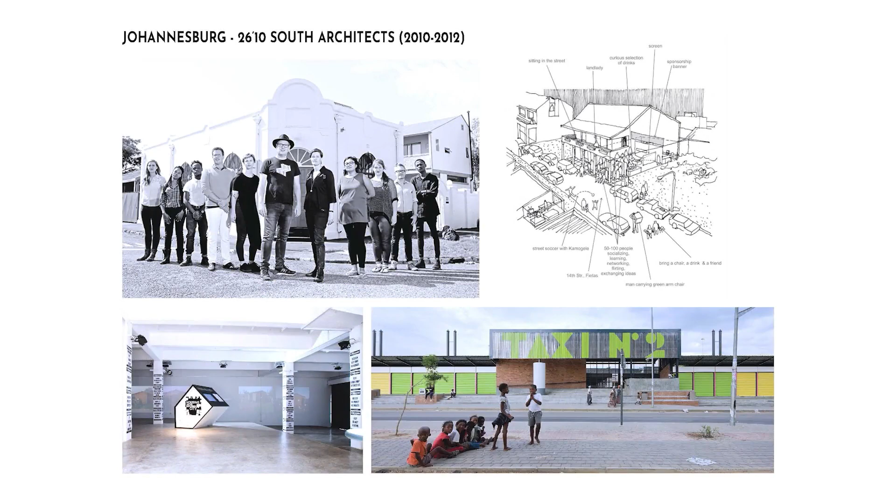Then I got encouraged heavily by one of my tutors to apply to work at 26'10 South Architects. Sorry, it's this outdated photo, Torsten. It may not be fair to the full team, this is from years ago. But I do want to say something about how this practice impacted me, because it really taught me how research in architecture was possible. And there is something about the name as well, being very local to Johannesburg and to your context, that I really appreciated working there.

Then also, this was a defining moment for me, this exhibition, because it enabled me to really center the African city. I know for students today at the GSA, it seems like a given. But if you think about the rest of the continent, a lot of the discourse of architecture didn't really speak about modern or contemporary architecture. And this exhibition that was done by David Adjaye back then really shifted that perspective, and indirectly brought me to London. But I got a chance to study at the University of Westminster.

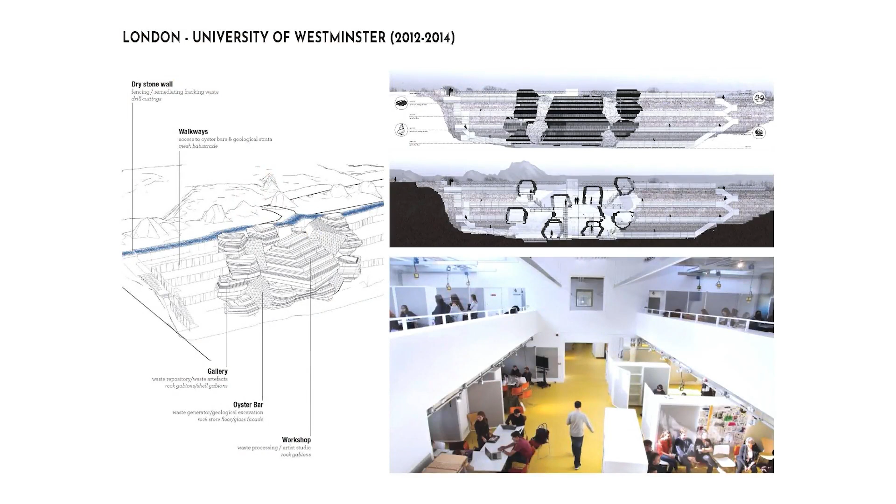My second year was under the leadership of Professor Lindsay Bremner. So South Africa met me again in London, which was a real lifesaver, because I learned so much from her and her very unique understanding of the Anthropocene as well, which was the subject of my final year thesis. And it made me think a little bit deeply about the importance or the weight of fossil resources, whether it's material or energy, like oil and gas that we use so much in the field of construction.

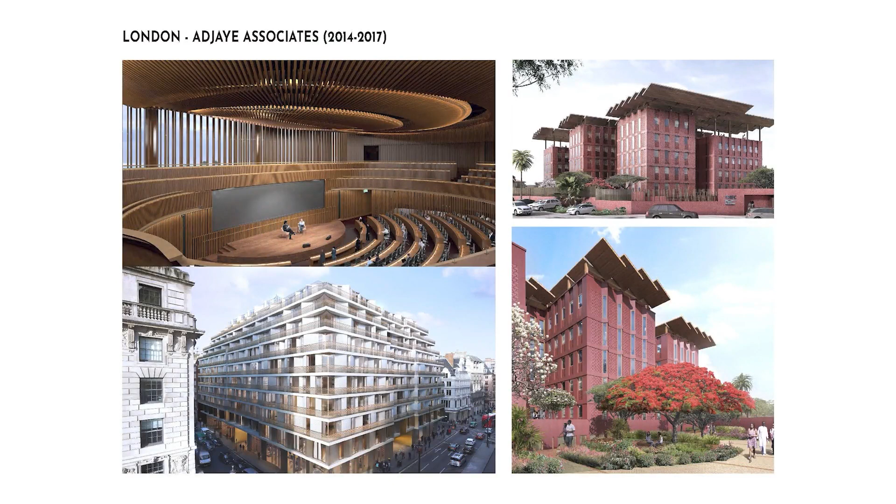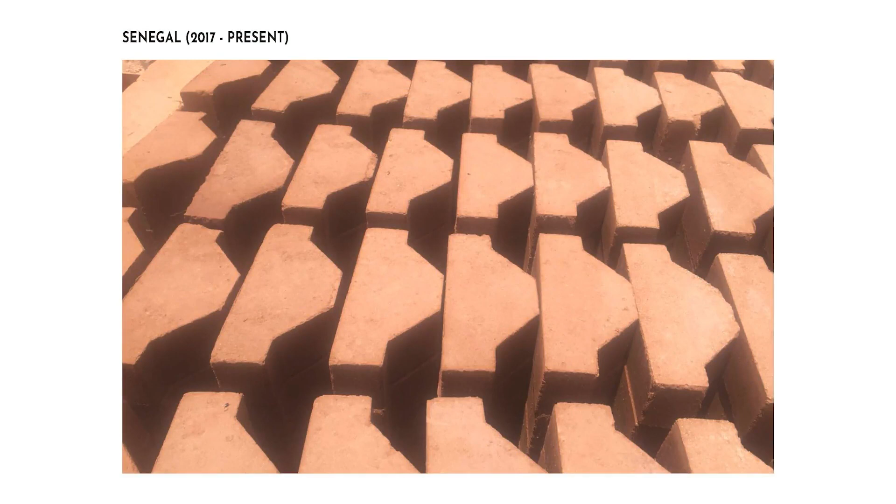I then went on to work at Adjaye Associates in London. And I got to work on very corporate projects, actually, working for big banks. One project was in London, and the other project was actually Dakar. The project you see to your right is the headquarters of the IFC. And that is, in a way, the project that prepared my transition to return back to my fatherland of Senegal. And these were the brick samples that were produced in that building. And through that project, I got a chance to meet a really incredible Senegalese engineer called Doudou Dème.

Who had come back to Senegal nearly 6 years prior to me and set up this company that was producing earth bricks. Through him, I got to meet many other architects and we formed a collective. We met on this particular street called Worofila. We didn't know that we were going to name ourselves that, but I had a little bit of inspiration from another practice that named itself through its territoriality. So when it came time to name ourselves, we just picked the name of the street where we are in Senegal. That's what is behind Worofila, which actually means seven. So we're on Street 7. It's not very inventive, but it was very important, jokes aside, that we are able to really be informed by our context, but also learn how to respond to it in a responsible manner.

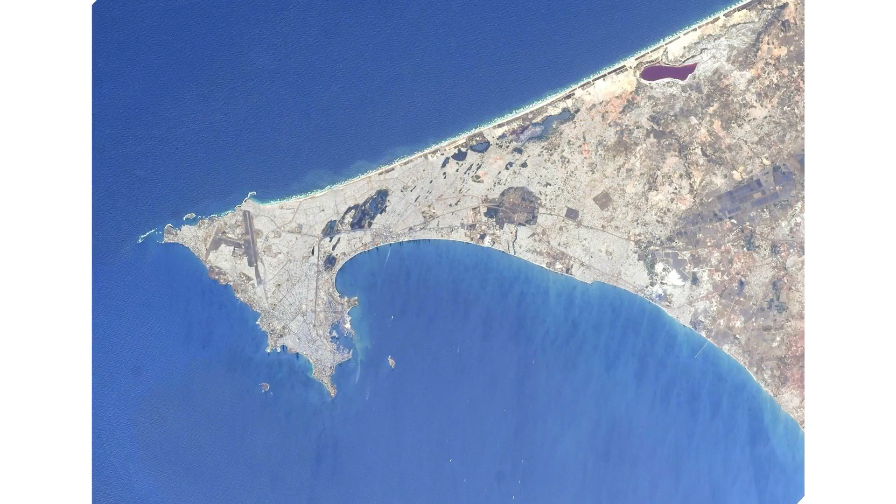Dakar is the most western city on the African continent. It sits on the peninsula, which is the peninsula of the Green Cape, the Cabo Verde archipelago islands just off the coast. Our peninsula was also named like that by the Portuguese explorer because of how green it used to be. Fast forward to today, this is an aerial satellite imagery of the peninsula, which has taken a very distinctive gray color, which is really a manifestation of the presence of concrete as a main material that produces the city.

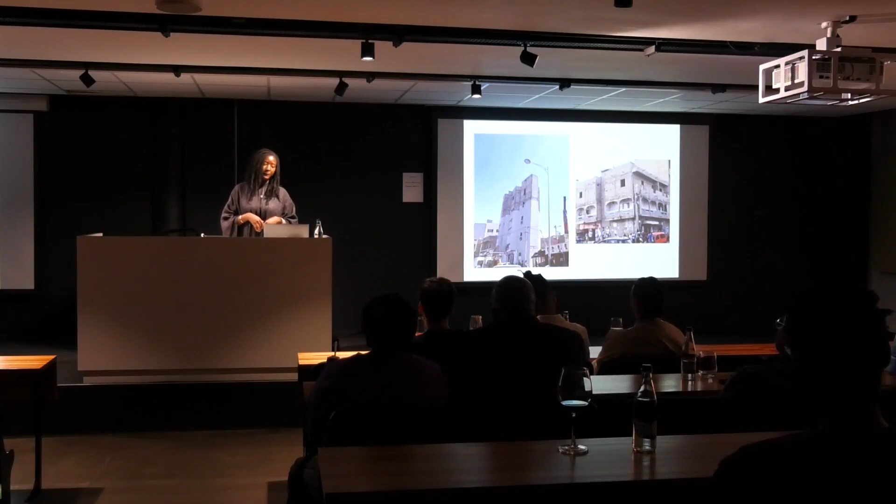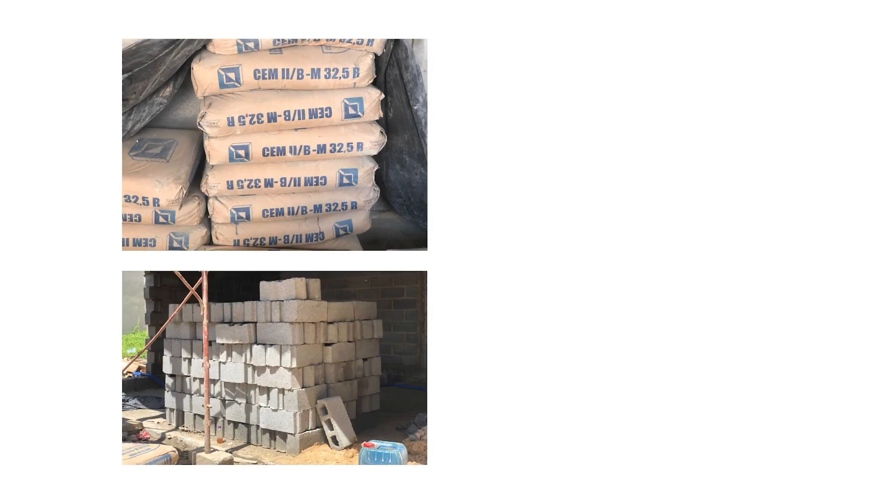It's also important to say that in recent decades, a lot of the city has been produced by people themselves, and concrete or cement is really the material of empowerment. In a context where a lot of failures from the state have operated, people have taken it onto themselves to really produce housing, done through cement. Senegal also produces cement, it's our 5th largest export. The cement is ubiquitous, you can buy it at any hardware store, and I think it just gives this ability, this facility, to want to buy a bag of cement. If you have a little bit of water and sand, you can start to produce your masonry blocks.

Usually the pattern of building is to get land acquisition, and then the first thing, once you have a little money, you buy some bags of cement, you produce the bricks, sometimes leave them on site, and you build incrementally.

When we look a little bit at the geography of production of concrete, which is the main material, a lot of these cement factories are actually within, I would say, about 100 kilometers from Dakar. Most of them sit within even the region of Dakar, and many of the extraction sites for basalt used as aggregates, and the place of production or recycling of steel in Senegal as well, are actually within the region. So we're talking about ecologies that are really in close proximity to the capital.

I think it's important to take a closer look and never dissociate materials from the sites where the raw materials come from, because they have certain realities. There are certain disturbances as well of the environment.

The top picture is a classic pine forest, not far from Dakar. A lot of the baobabs in this forest are being knocked over because underneath it you have limestone. I think, again, even when we look at this composition, there's something that needs to be recentered, which is the fact that it comes from a lot of these natural geogenic materials, because cement is also made with lime.

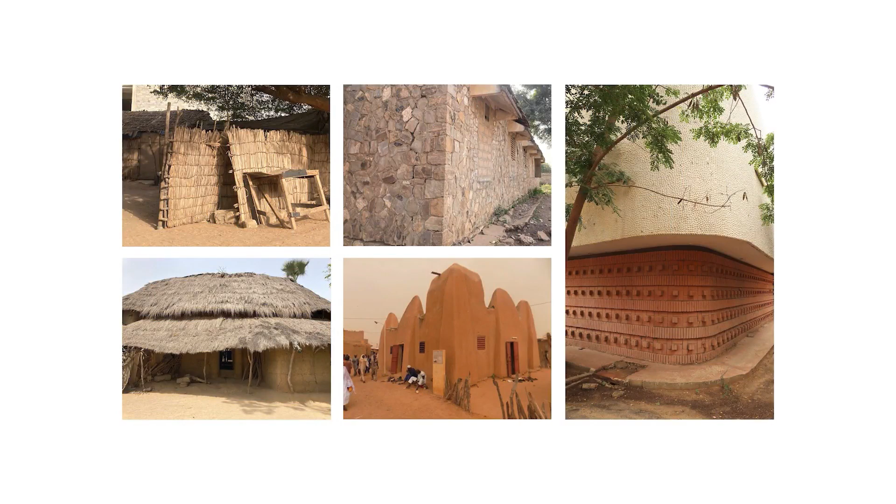So a lot of this extraction of limestone is what produces cement, along with sand and also clay. A lot of the clay quarries that they have nowadays are actually bought by cement factories. It's interesting to look at the ingredients of cement in relation to the kind of architecture and very rich architectural language that they were able to produce in the past.

I think when we look at different epochs of Senegalese architecture, we do see a very inventive use of clay, of fiber, of stone, of ceramics even, or shells as well, which often get used to produce a form of lime.

So this is the context in which we feel that bioclimatic architecture can become an interesting response to this over-concretization of the landscape, because with the concrete and the way that it's utilized, there's a lot of thermal discomfort that is generated in the interiors, but at the cityscape as well, because as a peninsula, people also densify.

I just want to speak to you a little bit through the methodology and the way in which bioclimatic architecture is also tied to architectural traditions. Our first vantage point is really to look at the climate, and this is a sort of interpretation of the Köppen climatic map, understanding the continent through its climatic zones.

Most of Senegal sits within the region commonly known as the Sahel, which stretches from Dakar to Djibouti on the Red Sea. We sit mostly in a hot and arid climate, with a more humid zone to the south. Looking at the stratification, the north gets very desertic because we're nearing the Sahara Desert, and the south is a lot more humid.

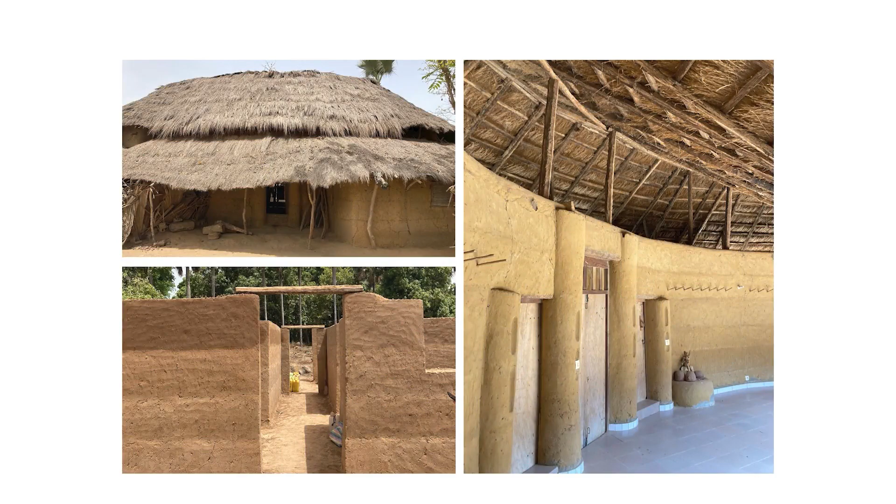The southern region, called Casamance, has a really rich and lush landscape. I say this as somebody from Dakar, but I think it also has a very unique architecture that speaks a lot to its climate. One of the most unique architectural typologies of the south are the impluvium houses, which are actually indicators of the geography in which they sit. Of any form of vernacular or traditional architecture, I think the learnings from it are quite incredible, because they give us cues on how to respond to a particular geography.

I first engaged with the materials we had there, but most importantly, to respond to the climate. Even looking at this picture, you understand this is a place that gets a lot of rain, because of the structure of the roof—as an impluvium, it's really a response to rain, to be able to gather it.

I think these simple diagrams are important to showcase what we can learn from this traditional typology.

With the impluvium house, it's important to see how it's really shelled up from the outside, and orchestrated around a central courtyard and atrium, which is the main source of sunlight.

After learning those principles, this is a good way to speak about one of our key projects, a vertical house in Dakar, completed about two years ago. This was a very important project because we had to find a way to produce housing in the city where the land parcel was quite tight—the plots are 150 square meters. The brief was to produce an earthen home in a very dense urban environment.

That forced us to look at how to achieve a certain level of verticalization, but also of passive design methodology, so that this house would not require any AC or heating for thermal comfort.

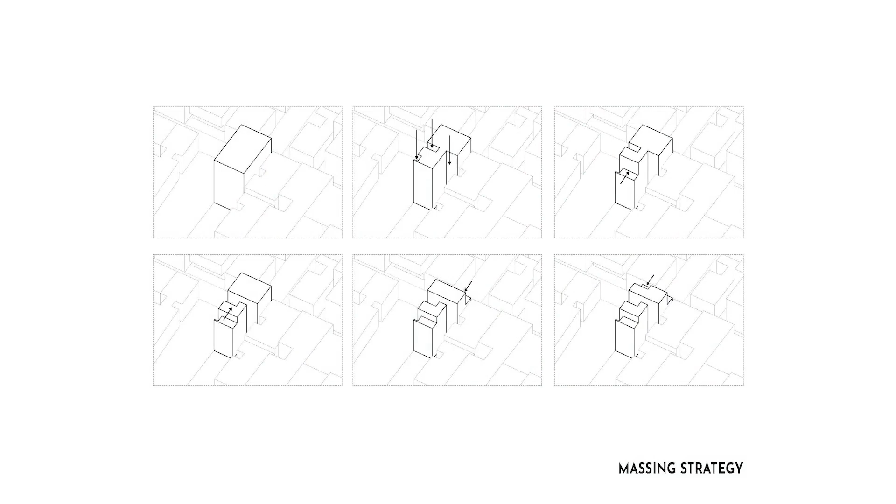The massing strategy managed to respect the urban planning laws, which unfortunately in Dakar is quite exceptional, requiring you to build on a maximum of 70% of the land. So the first thing was to create these atria—about three of them—which are useful for ventilation and lighting, and to have setbacks from the third floor to allow for rights of light, so there's no big block preventing light access to the neighbors.

This is how it sits within the environment—going back to that image of the concrete city, this is the project in relation to its urban setting.

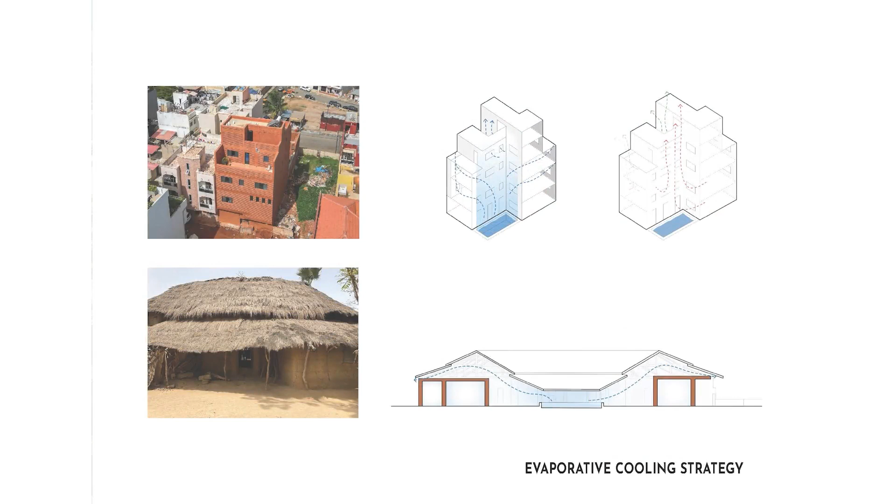This comparative diagram often showcases the ways in which the central atrium, which actually features a pool, is able to play a role in contributing to cooling through the evaporative cooling strategy, the same way as with the impluvium houses.

We also managed through this carving out to ensure that most rooms have cross ventilation as well, and ensured that through these various atriums we're able to get some amount of light in addition to the main street facade that they have.

Other strategies were integrated into the facade to provide cooling, which also speaks to the materiality of the project, made with compressed earth blocks. We found a way to have a facade system that allows for shading on part of the wall, particularly since we're in the northern hemisphere facing the southern sun, which is the problem especially at midday when it's really hot.

So this is a small strategy that we developed and use in multiple other projects.

Let's take a closer look at the detailing, because when you work with bricks, and this is a load-bearing brick project, although there is some column reinforcement which we did in order to reduce the thickness of the wall, you have to be very intentional about how you case the bricks. I don't have to explain brick design to people in South Africa because it's very ubiquitous here, but this is something we've taken to task, and I think we also learned how to play with it to produce a very distinctive materiality that speaks to the composition of the wall and is able to do multiple things.

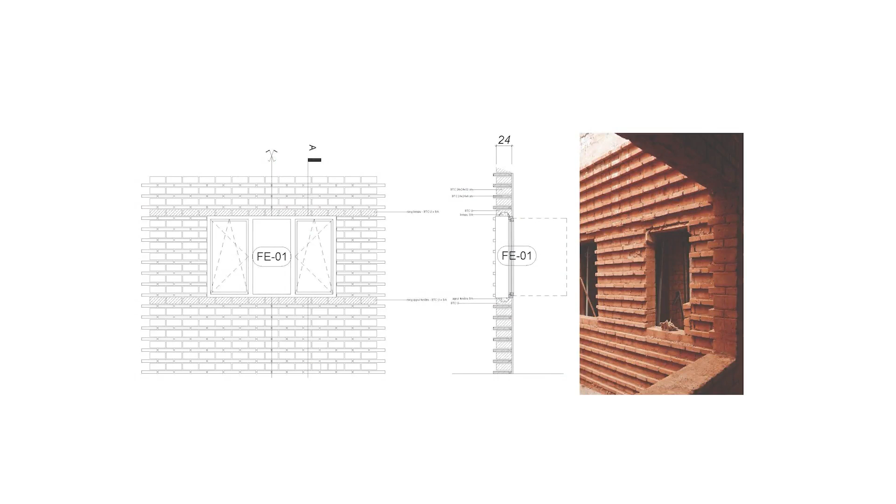There are also lots of detailings around openings, because we're working with a modular material in order to prevent any type of light offcuts and really have the unique quality of the brick determine the composition of the facade.

The final finish is really the raw color of the earth, especially on the exterior. I think it's important that it communicates what the building is made of, but also that we live in a context with a lot of sandy winds, and rather than paint it or use a light color, this material actually sustains that sandy air quite well.

Shifting a little to the east, still within West Africa, another territory where we've gotten the opportunity to work, actually our first work outside of Senegal, is Nigeria. Looking at it from a regional climatic and historical perspective, it's interesting to see the commonalities that exist with Senegal. I'll draw on those comparisons a lot, because as an architect coming from Senegal trying to learn from the place and its traditions, you always wonder: if you don't know about a certain place, how can you design for it? It's interesting to see how the baggage we hold from that region can travel, and how we find echoes in a context like Nigeria.

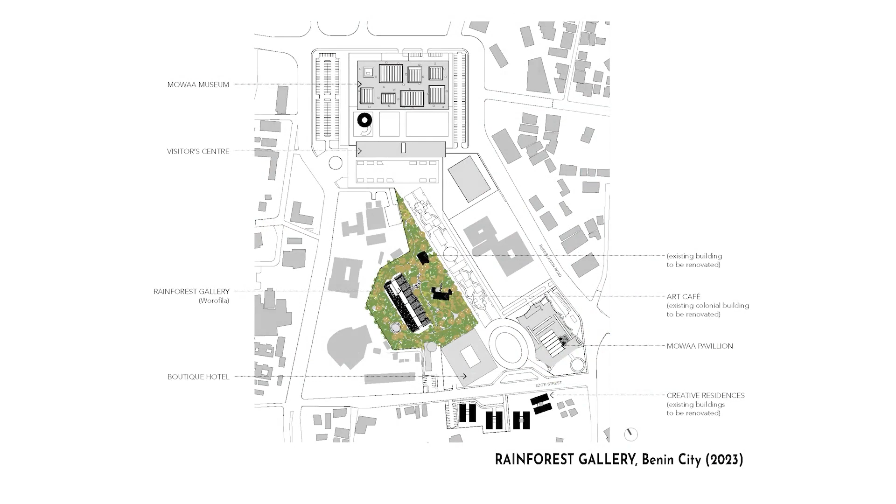The project we got to do is part of the larger campus of the Museum of West African Art, in the historical city of Benin. We were commissioned to build the Rainforest Gallery, a gallery for art meant to sit in this precinct, which also includes a museum, a boutique hotel, and a pavilion for archaeological research. Our project sits within a replanted rainforest, also seen as part of a restoration effort in a place that has lost a lot of its natural ecosystem.

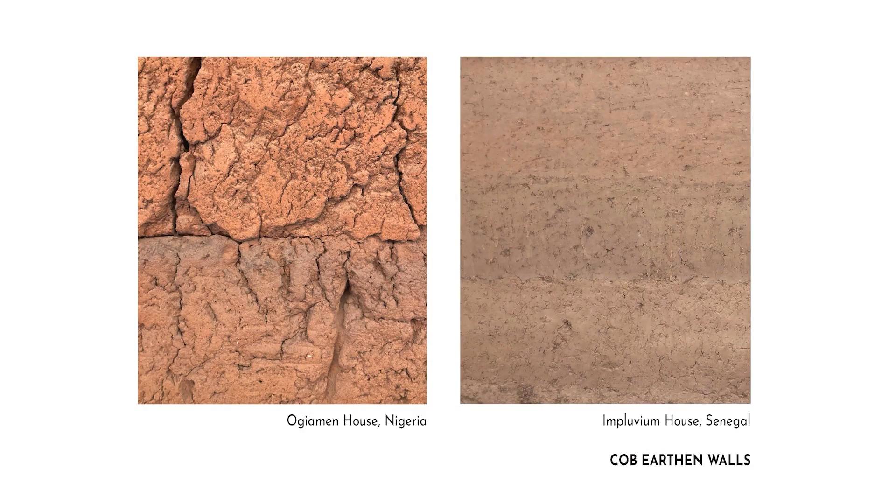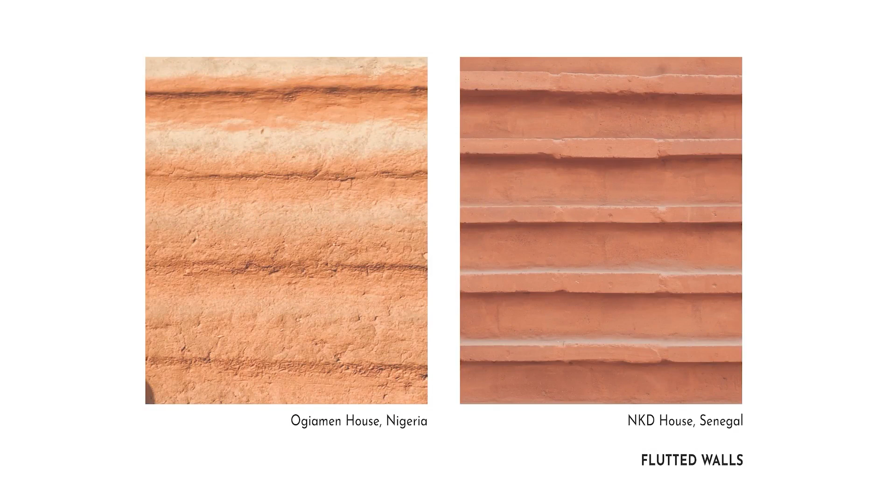So to draw again these parallels, you look at the left, the wall in Benin, of a house of a noble person, Ogiamen's house, and on the right you have the walls from Casamance in Senegal, and both of them are constructed using the technique of cob, which I'll speak to a little bit later. So we already had a certain degree of familiarity with this technique once we arrived in Nigeria.

Another thing about these walls, there's this horizontal texture that you see, which is called fluting, a technique which actually allows for a control of the erosion of the walls through water. By scoring the walls, you slow down the way that water percolates through it. So it is a form of erosion control. But it was also something that was only made in this royal architecture because it also demarcated status.

Another funny anecdote, I'll speak about it later, but the NKD house, the vertical house, has, I think, a similar texture through the wall, even though this was not thought of as a form of erosion control. But again, we recognize that certain language in the architecture.

We may have heard about the Benin bronzes, which are really at the heart of a lot of the conversation around restitution, because it's one of the most evidently documented cases of looting. Yet there's an argument as to whether they should be returned or not. But yeah, the campus also, I think, was the project that was generated out of the conversations that have been held around it.

But also the anecdote that I wanted to share from researching and understanding this royal and palace architecture is that the cob wall layers, because it's built in layers, actually had names, and you could have I think up to six. So you have the foundation layer that had a name, and all the various layers, and of course only the king could have the biggest amount of layers. I found it incredible that it was like a language to codify a construction technique, which is very precious to us.

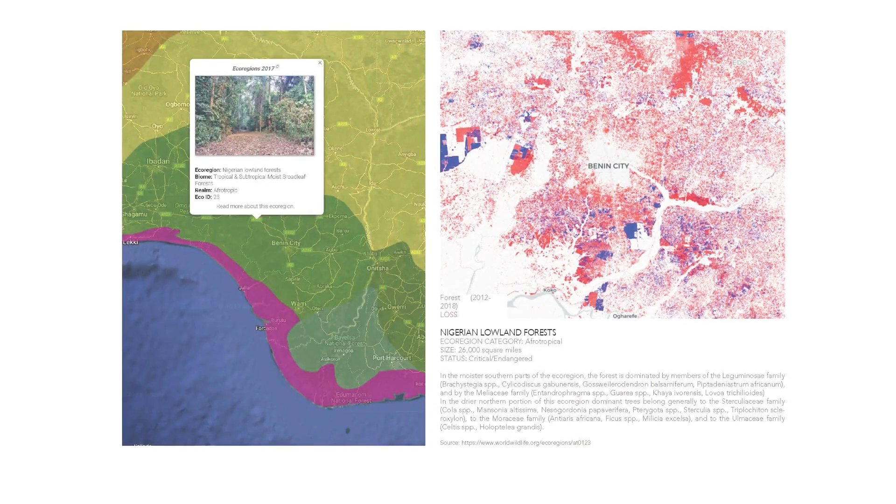Rainforest, again, this is a map of the loss of forestation in red that you can see in the context of Benin City. The type of vegetation of the place is mostly tropical, subtropical, moist broadleaf forest. That's a biome. This project is an effort to contribute to reforestation.

We looked at working with endemic trees, and making sure that the forest also had spaces for art that would complement whatever is happening inside the gallery, really allowing the visitors to inhabit this space. And that really guided a lot of our strategies for the design of this.

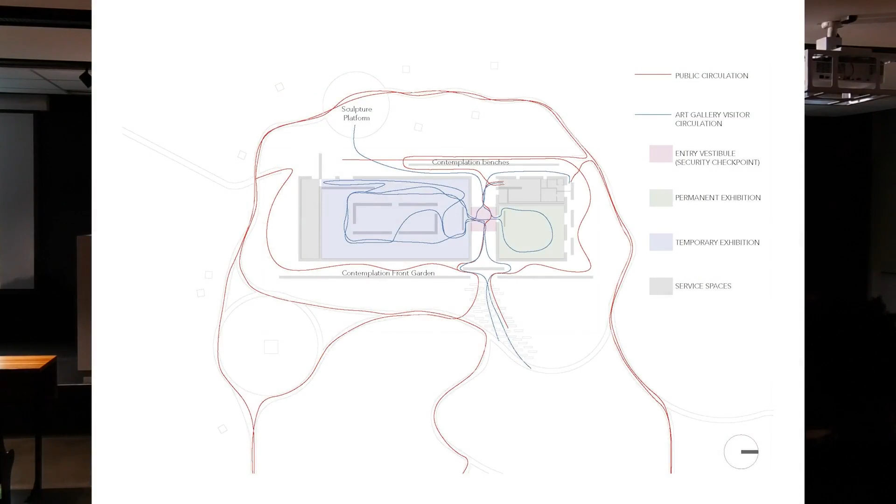It's really composed of two spaces. You have the permanent exhibition space, which is smaller, and the temporary exhibition space, and the two are separated by a vestibule. And our desire for this was to make sure that people could also inhabit the envelope of the building.

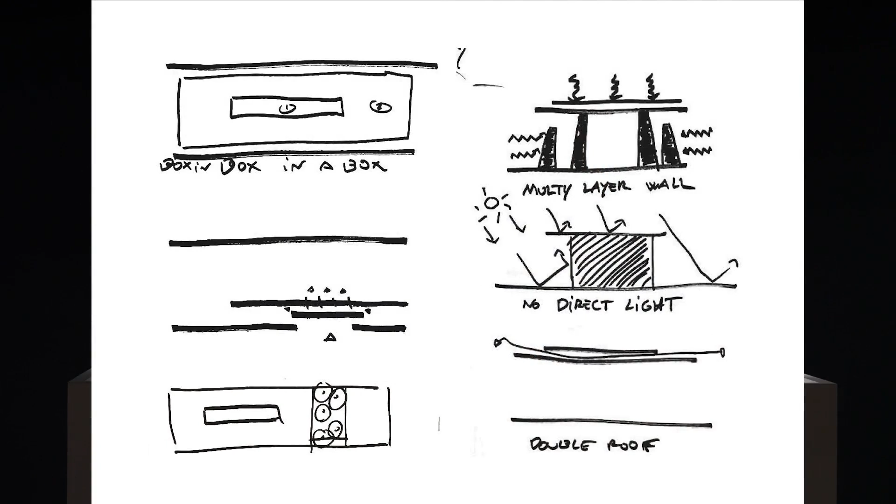So if you are sort of like public, that isn't necessarily going to the gallery, you can have some interaction with the building, and you can visit the gallery as well. You're able to have a kind of pop-up that allows you to personally engage with the envelope of the building.

And in terms of the generative strategy for this, it was very much guided by wanting to create a kind of microclimate in the gallery. We had some requirements for certain temperatures that we had to achieve, which are actually quite low given the temperatures of Benin. It was about 20 degrees, which is what was set by international standards, and 50% relative humidity.

So questions of climate control and the passive design strategy: even if the building would definitely require some level of air conditioning, we still wanted the architecture to contribute to lessening the load and reliance on technology for cooling. So we set in place a series of strategies. One is the box in the box, which is really effective for acoustic control, but also for thermal control, to have a space enclosed into another one.

The sequencing as well was really key, because we felt there was maybe a potential disposition to think that, you're going to have this forest, you're doing a gallery, you can have this very open glass box. We felt that this level of openness and transparency doesn't sit very well with the cultural understanding of space. Threshold is really important. How you approach a place, how it reveals itself, is something that is really key.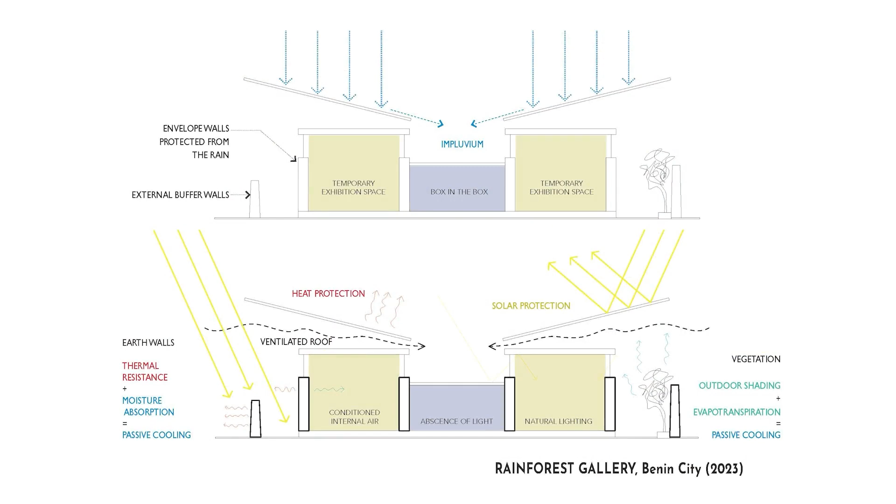Drawing again on parallels between the vernacular architecture of Benin and that of southern Senegal, a lot of the royal architecture also features this kind of impluvium, and the central lighting is something that we see in both architectures. We drew on that to devise the space of the gallery. So we have this inverted roof, which allows for central collection of rainwater.

And then we've lowered the middle space, the box in the box, because it allows us to have two aisles and two spaces that are indirectly lit. So we have a darker room in the middle, then the mid spaces on the periphery, and then the external buffer walls, which also allow us to contain a layer of vegetation, and give two things: one, increased thermal resistance,

but also allowing vegetation to come in close contact to the spaces that are inhabited in the building, because of the power it has to provide passive cooling through evapotranspiration. And earthen walls as well, because they are raw, have a potential for moisture absorption, which is one of the biggest properties contributing to thermal comfort, because especially in very high humidity environments, you want materials that absorb that humidity, so with lessened humidity you feel cooler or a little bit more comfortable.

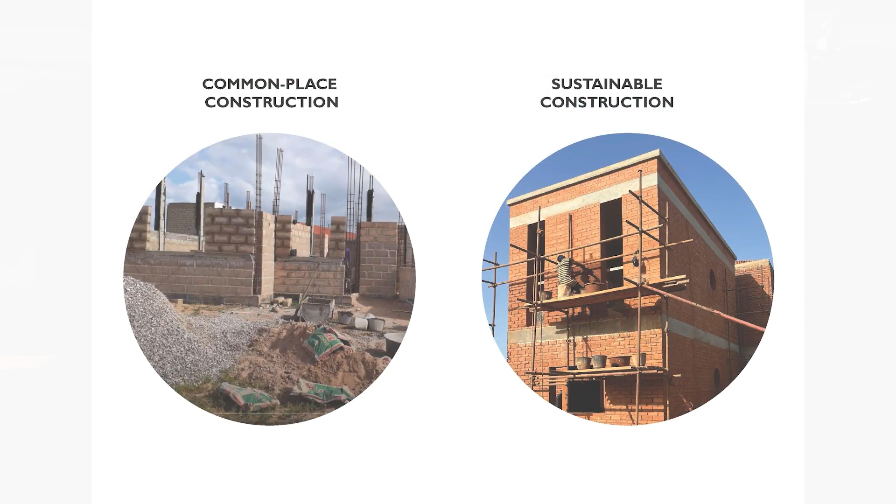So going back again to this dichotomy between what is common-place construction with cement and sustainable construction, which in our definition also allows you to center bioclimatic and passive design methodologies that I've explained previously, but also utilizes these materials. We are now at a case where we are trying to think very intentionally about how to construct a typical building and all its various components in order to be able to reclaim them.

So it's actually not just the envelope. There's a growing reflection around all the energy, like electricity. When do we really need it? Are there alternative ways to fuel electricity? And also think about plumbing and elements in the windows in relation to our climate.

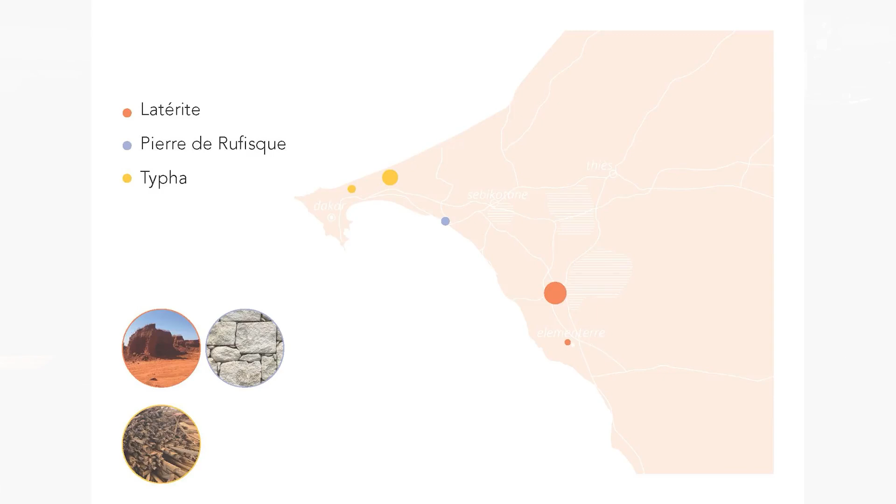So this is a bit of a toolkit of the kind of alternative solutions that we've developed to very conventional building practices, which utilizes these natural materials and different construction systems as well. And for that, we also have to be informed by the materials that are available locally. We are based in Dakar, so even though we have more and more projects in other regions, our immediate context of operation is close to the Dakar region, the capital, which is a place that has a lot of laterite. Laterite is a very distinctive, sort of red earth.

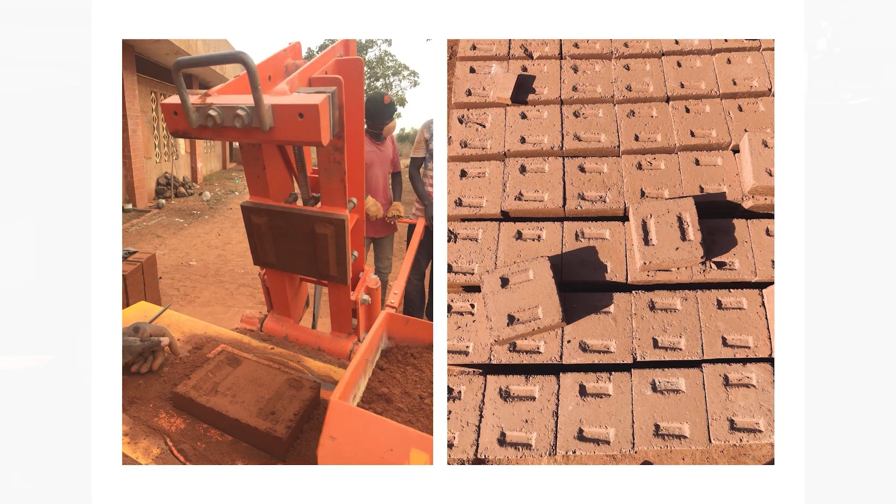It is quite unique in its composition because it has just the right amount of clayey sands, gravel, silt in almost equal proportion, which makes it a really good candidate for rammed earth. Or if you think about rammed earth in a mechanical, industrial way and at a smaller scale, you have this technique called compressed and stabilized earth blocks, which is the other, using a machine. This is a manual machine.

There are so many open source CADs for how to produce a mold. So this is a version, but there are much simpler molds for it. They're very popular in places like India as well. It's not a traditional technique, because of the machinery used, but also the stabilization, which is done with either lime or cement at a very small amount, about 3 to 8%. Of course, that kind of negates the traditional aspect to it. So I think it's important for you to understand the distinction.

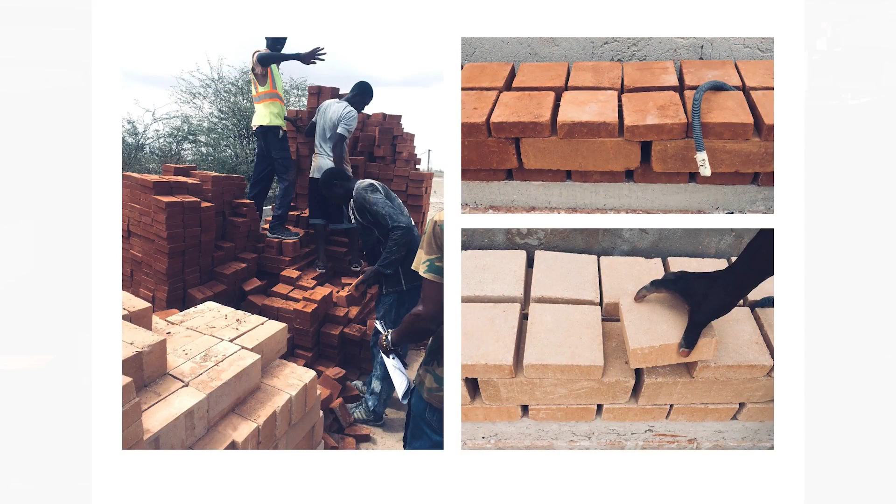I've shown you projects made out of CSEBs, but as we go forward, it's something that we are also questioning nowadays. But in the early days of our practice, as I explained to you, we exist because of this engineer who produces these bricks in this factory, which we have access to. And it's great to have access to places of making because you're able to engage with the process in a very inventive way. And the first thing that I did when I went to the factory was to see the laterite there, but lime and sand as well, and think and test various compositions to see the various outputs that could come out of it.

These are bricks for my first project in Senegal that were ordered at Doudou's factory and delivered on site, and to the right you have the dry stacking of all these bricks, which has to be done also for coordination purposes. But this is a little tip in site management as well. Nobody cares about the drawings. The tolerance of the drawing is not the tolerance of the site. So you have to make sure that things still fit.

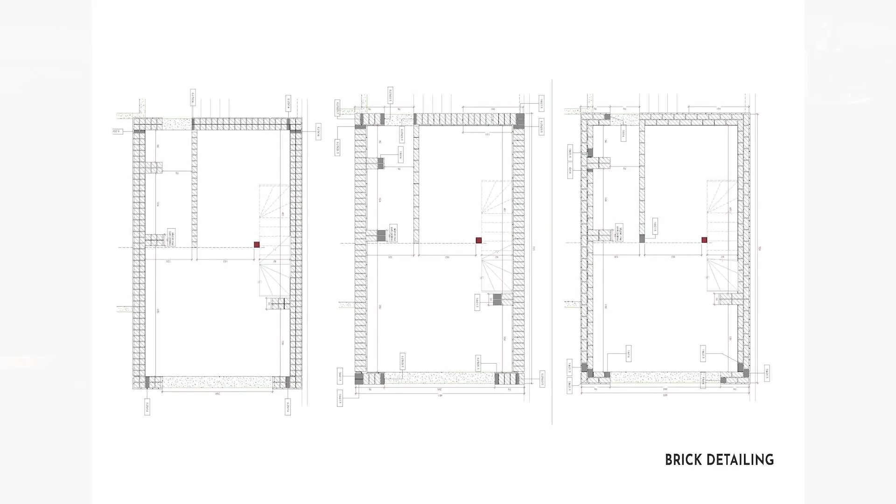And dry stacking is a good exercise to ensure that the masons understand the importance of the layout, and that we're able to make these types of corrections before they actually execute, because layers are repetitive, as each of the courses of the brick profile are detailed separately. So this is something that we do for ourselves. I've accepted that drawings are mostly for the architect, but they do allow us to have quantities to be able to order and to foresee any issues in the project. The modularity of the brick again allows for this type of organizing of the facade. You can see how you can build this whole facade with a unit, which is the brick.

Another material that we work with is Typha. It's an invasive plant in Senegal. Some of the students have spoken a lot about wetlands, and I wonder if I didn't spot this plant at some point in the pictures. So just look out for it, because it has very big leaves. It's non-endemic to Senegal. It's invasive. It's taken over a lot of water bodies, and it grows in brackish water. It grows super, super quickly. You cut it and it regrows within weeks.

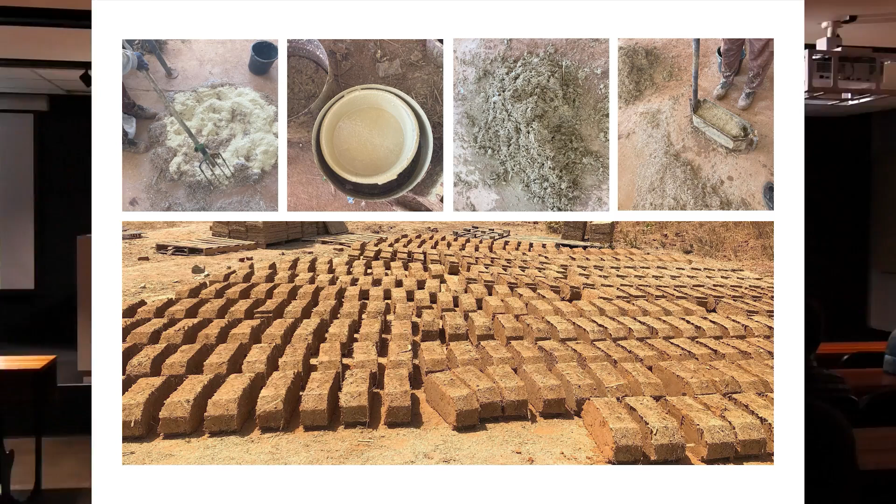The one thing about Typha, which is quite incredible from an architectural perspective, is that it has really great insulation properties that are quite similar to hemp, and we have an abundance of it. Typha, when it's cut and dried, has to be properly dry. We have the ability to crush it with very simple machinery, and mix it with clay, which in this case acts as a binder in order to produce these insulating blocks that are sun-dried. But you see the process, how super low-tech it is.

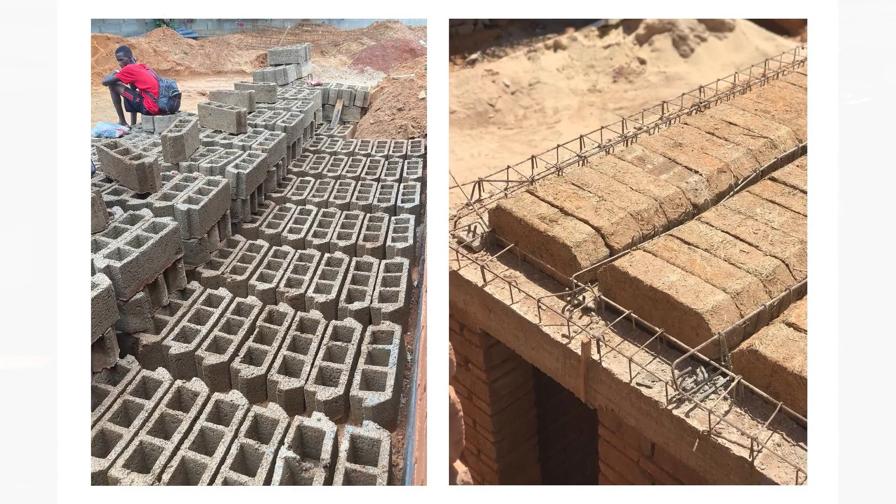This is the same as producing the sort of cement blocks that people use to make these intermediate floors of flat roofing, which is quite common in Senegal because of our climate. It doesn't rain a lot. And this is probably one of the technologies that I believe in the most, because of how simple it is, how it relies on a very prominent resource, but also the fact that it just allows for substitution of a technique that people use a lot.

And I think it has the potential for one of the most important strategies in passive design, which is to insulate the roof, which is always exposed to the sun in a context like Dakar. Even though this is an alternative material, it's very important to afterwards have the level of waterproofing, and you can have it as an intermediate floor or as a sort of bio-roof slab.

In the first project that I showed you a little bit before, this was also the material that was used for the roofs. On the bottom right, you see this sort of Typha block, the way it's meant to be used. But throughout the course of this project, there was an issue with the machine at the factory, because the crusher stopped working. So the contractor was asking, where are these materials that you want us to build with? And I said, look, I don't have them, but they seem to have at the factory these wooden panels of Typha that are 10 centimeters thick, which I felt should do a good job to insulate the roof.

So that was a sort of substitution, which was then covered again with a screed to fall. It was important to make sure that all the roofs of the house had this Typha to act as an insulating layer.

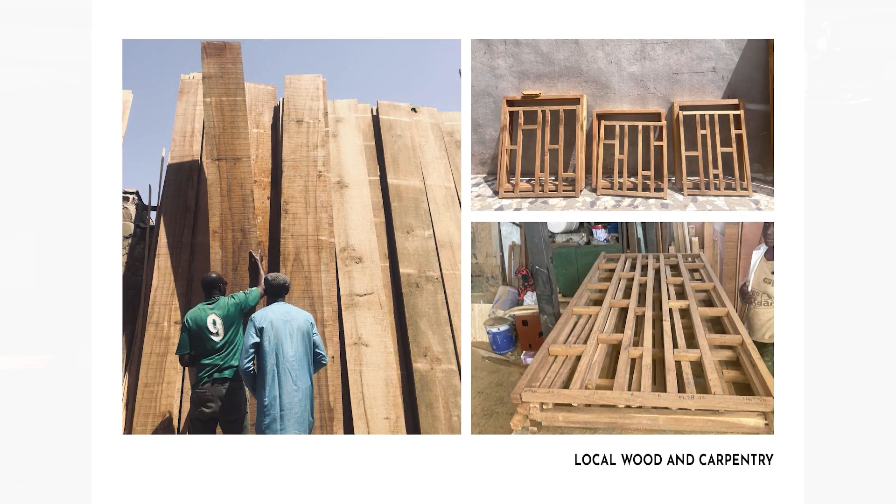Local wood as well, even though in our ecosystem we don't have as much of it. For this particular project, I chose to work with it because it's very close to the sea, and working with metal, particularly for security, just wasn't going to be sustainable because of the salt corrosion. So I developed this system of openings using timber, making sure that we had openings that were there for security, for ventilation, for light.

That forced me to have very careful consideration, of course, of not just the size of the openings, but the amount of space that could open to allow for fresh air. Making sure that there are mosquito nets on the outside so that the air can come in, but not the mosquitoes, because of the climate that we're in. And this is sort of the final result. Also, these openings were done with the local carpenters as well.

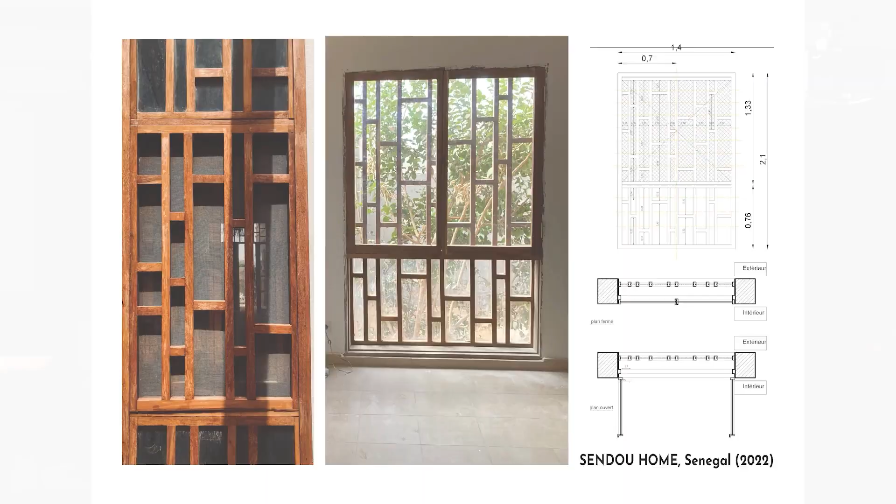This is actually the carpenter right next to the office. So I was able to control this by just sitting on my balcony and seeing what it's like. But that's also what is nice about our ecology, that we have so many resources there that we can work with. It's obviously a lot more monitoring, but I think it gives a greater sense of empowerment as well to work with that.

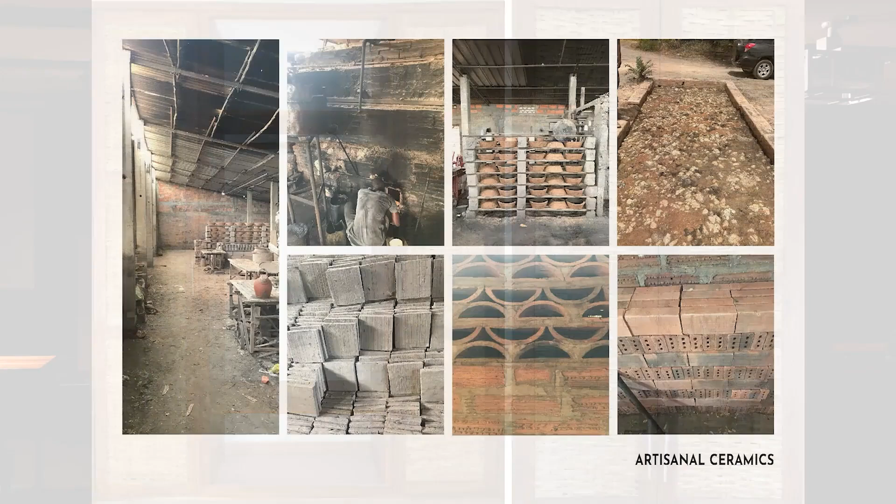There's this small artisanal factory which produces ceramic tiles that we also work with, and it complements the raw earth construction quite well because not only is it the same color, it's essentially the same material. It's clay, it's just fired clay. So we're able to use it mostly in our earlier projects, mostly for flooring outside and inside as well, like in the vertical house.

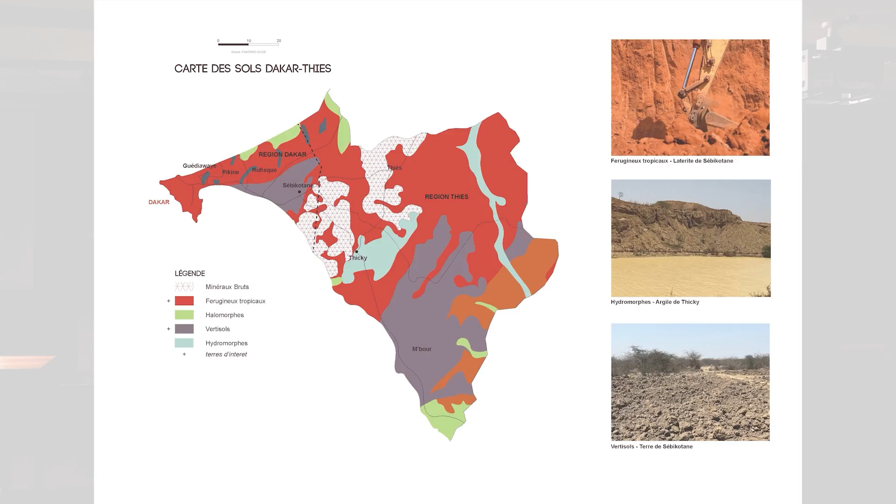But laterite is not the only type of clay-rich soil that we have in the region of Dakar. There's many others as well. So in the red, you see the laterite, but there are many other types of clays which have very distinctive colors. Remember this picture from the article that Nick showed yesterday?

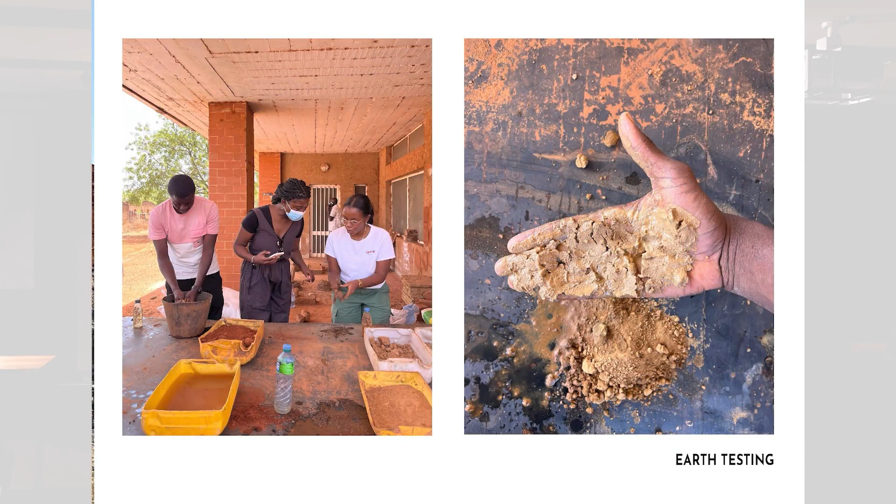So working, and expanding our minds to really welcome and explore working with those various types of clay, really goes through a process of earth testing, which is very manual. And I think there's a way of working with natural materials that engages the body and generates a way of knowing, which is actually quite incredible because you never forget it.

And here you see the diversity again of soils that we get, that had different appearances, whether they're dry, plastic, and at the bottom you have what in French is called the cigar test. I forgot the name in English, but it's a test in which you make a kind of tube with earth. You push it over the ledge of a table and you see how it breaks, and it tells you everything about the clay content, whether it has sand. And those tests give information about what you do with the bricks.

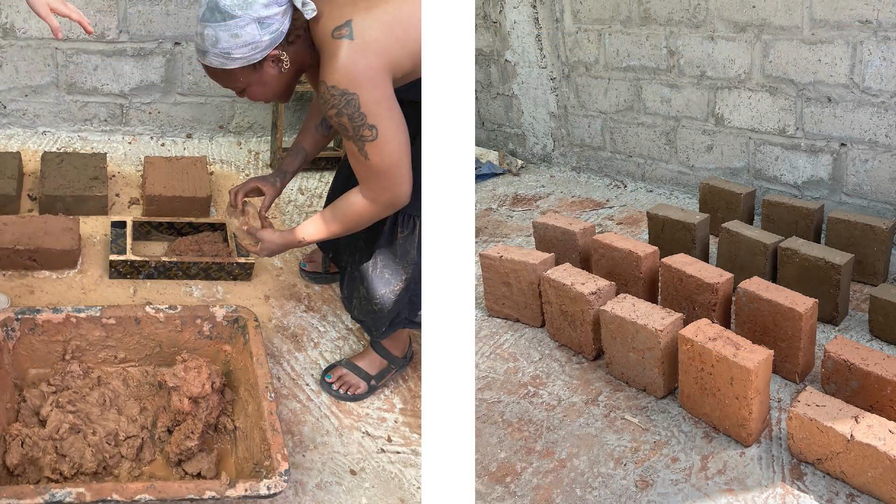Typically as well, one of the things that we started to look into is adobes, which are commonly known as mud bricks, where maybe you need a little bit more clay than with the CSEB. It gets mixed with water to rest for a few days and then is sun dried. And this is us documenting the process of how we work with adobe, but it does sometimes involve some level of reinforcement with typha fibers as well to prevent it from cracking.

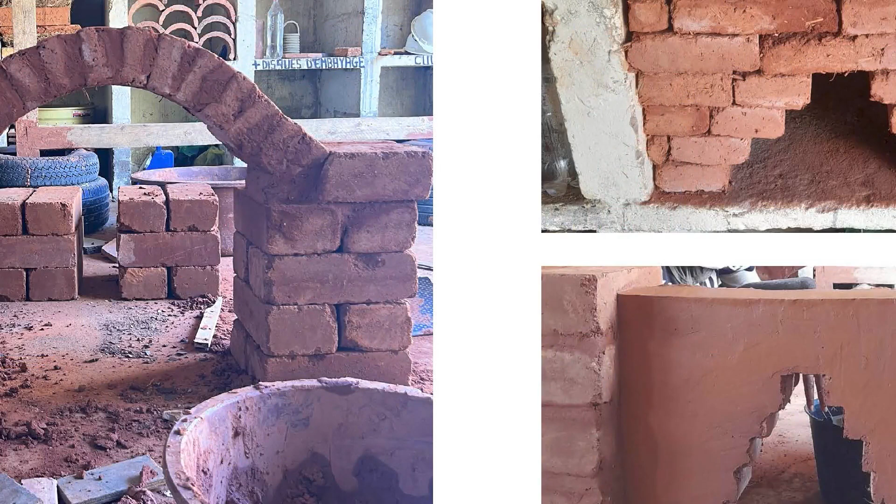We've also been able, in recent years, if you remember the toolkit table, to think of alternative building systems. We felt that it was important for us to develop it ourselves. Before, we had the advantage of proximity to this factory, which taught us a lot, because Dudu is not just a manufacturer, he is also an engineer trained to understand earth construction and also to build. So he's building the project that I showed before. But we've been able to set up this lab where we learn how to do things ourselves from scratch.

For instance, even though we haven't done it at full scale, we'd never been able to build an arch without having a kind of concrete beam on the side. So this forces us to do a lot more research, understand techniques of Nubian vaults, for instance, and really be able to test it out, or corbelling as well, to be able to generate openings through a wall.

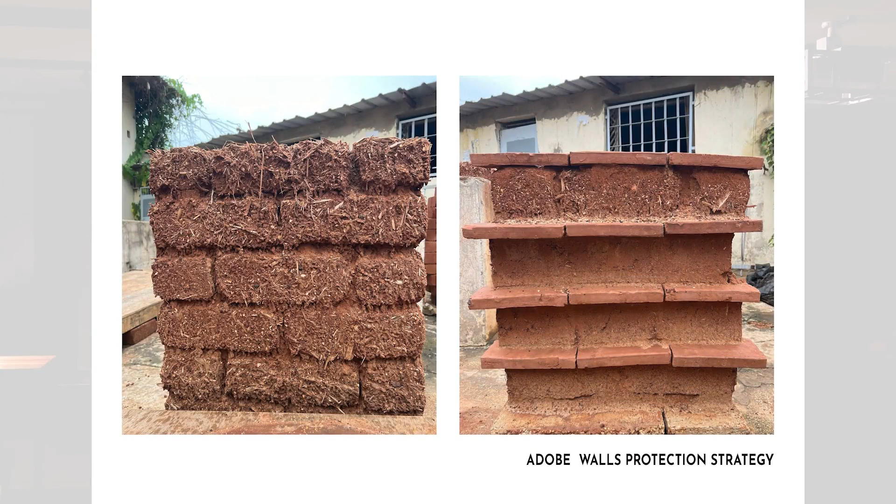Back to the conversation on erosion. Adobes do not have any cement. They may have fibers, but ultimately this is just raw earth. And if you do not protect them from rain, they'll weather. Given that we were already working in ceramics and already had this language of the overhanging bricks with the CSEB project, we tested out the wall to see what happens if you put the ceramics flush as inserts, and also what happens when we have them projected a little bit from the wall.

This is the result at the end of the rainy season. So it's been nice to be able to test out these various solutions and also combine various materials that we've been working with, also clay plasters.

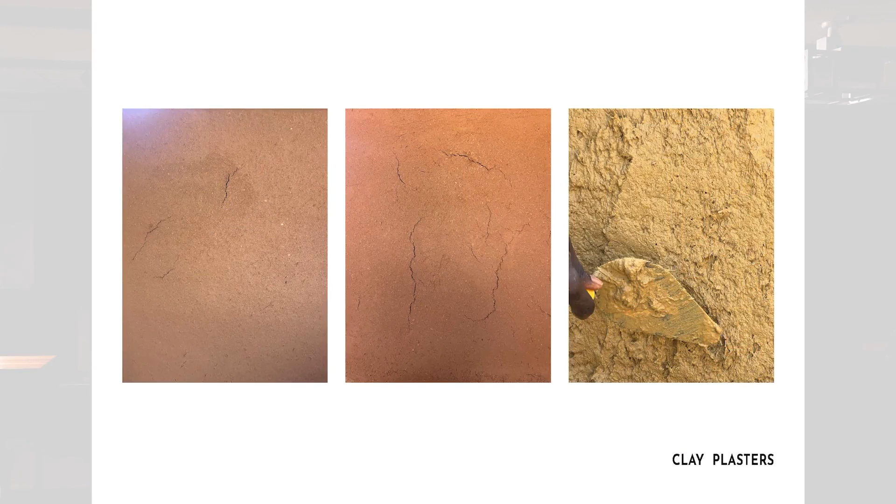The students and engineers worked together on number combinations. It's important to witness the cracks each time and write down the recipe, because there are quick ways to correct them. That just indicates there's still high clay content, which you can easily fix by adding fiber or sand to your mix.

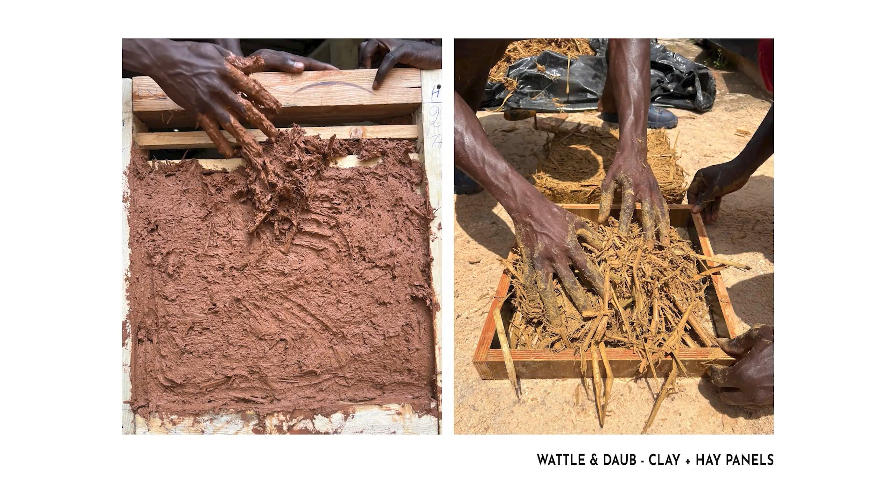Wattle and daub is also of interest to us. This is a technique that is quite prominent in Europe, as it is in Africa, because it allows us to work with timber or fiber combined with clay.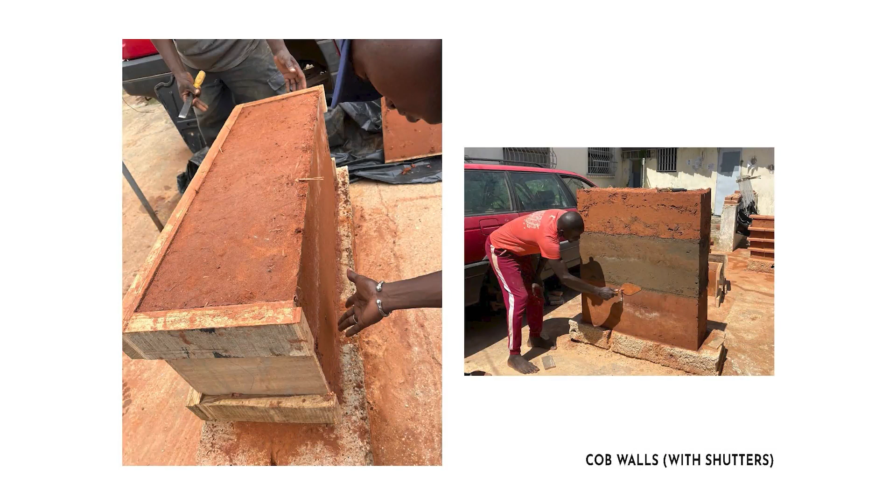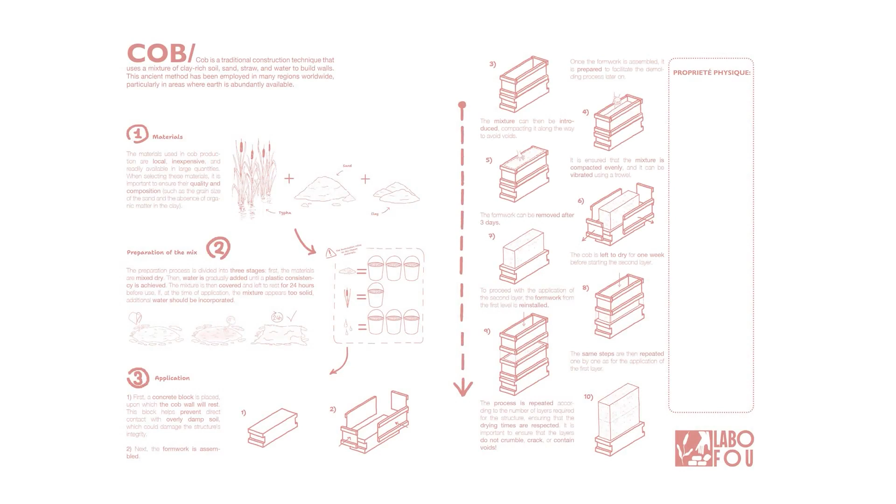Back to cob construction - this time we tried it with shutters to see if we could achieve sleek walls, and also test various compositions with the clay soils we have available. This is the manual for shutter cob, which is a bit more cumbersome than doing it manually, since traditional cob doesn't require any shutters. But we were happy to test it out.

We also remember to develop strategies to protect the wall. If we're building this low-tech system, it's important to think about roofing that people can achieve with cheap materials like zinc roofing, using thin clay panels underneath to provide insulation. Although air is obviously the best insulator, so any elevated roofing works as well. These were all part of the exploration.

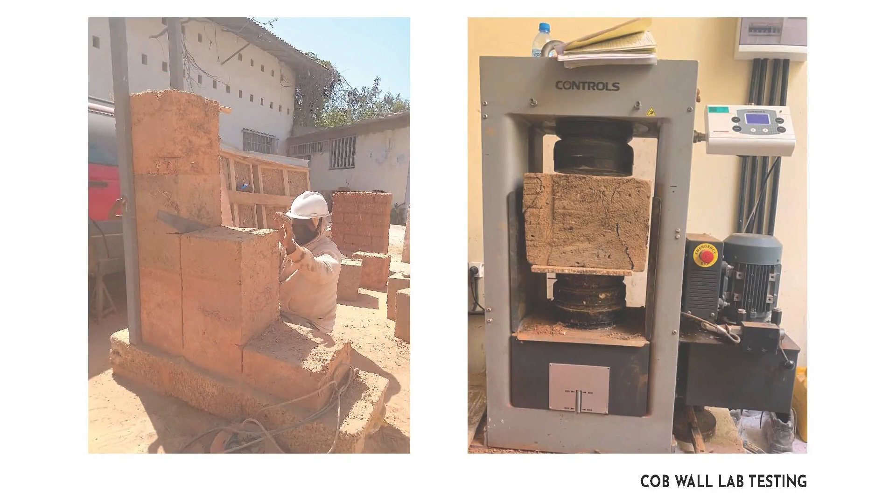Because we always use earth with low bearing capacity, although we do very manual and physical tests, we also work with local labs. Here you see the prototype wall being cut into pre-samples to bring to the lab for compression testing, so they know how we can design it and the results we can get from these various compositions we develop.

We're also working with stone, because mostly basalt has been used as aggregate for concrete, but there are so many other types of stone. This is a type of sandstone that exists within the region of Dakar - a geologist actually guided us toward it. We've tested its compressive strength, and also made samples for the foundation we're going to build.

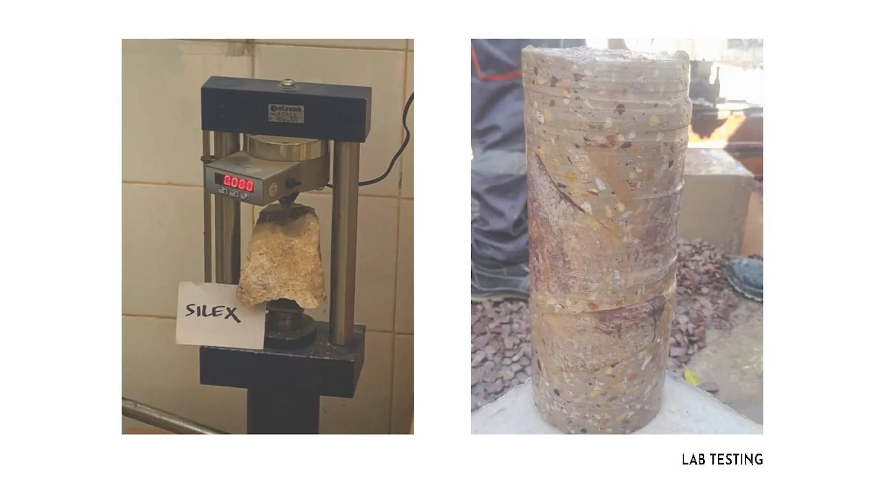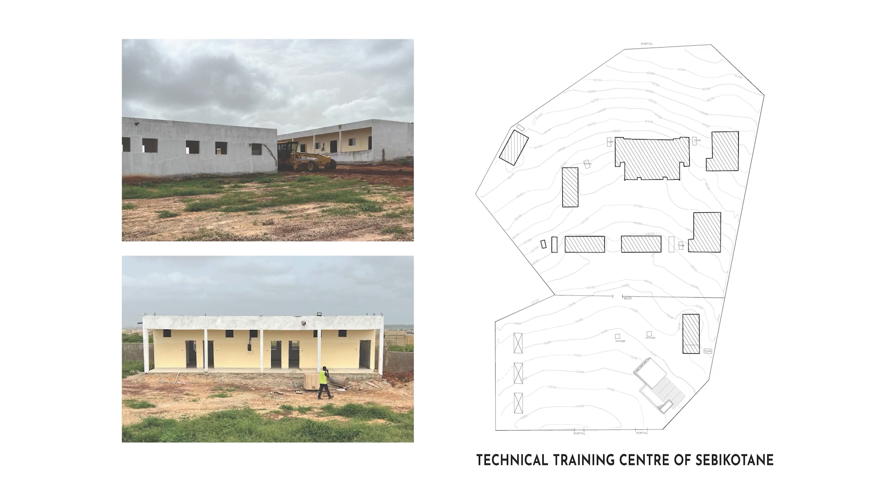I'm showing all of this because it's become the groundwork for a very important project we have, called the Labo - a training center outside of Sebikotane. It's a place where we want people to be able to learn about eco-construction, and we've inserted it within an existing technical center. It's a place for learning, producing, and sharing. The design was really informed by a lot of these techniques we developed.

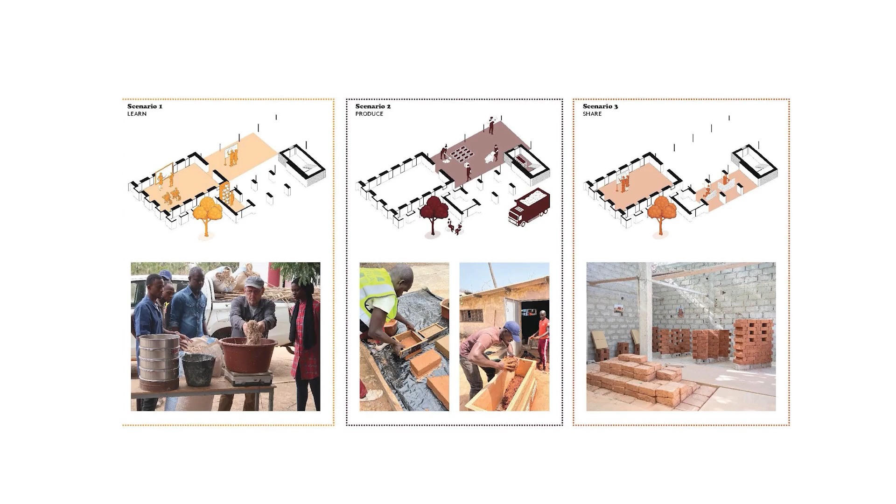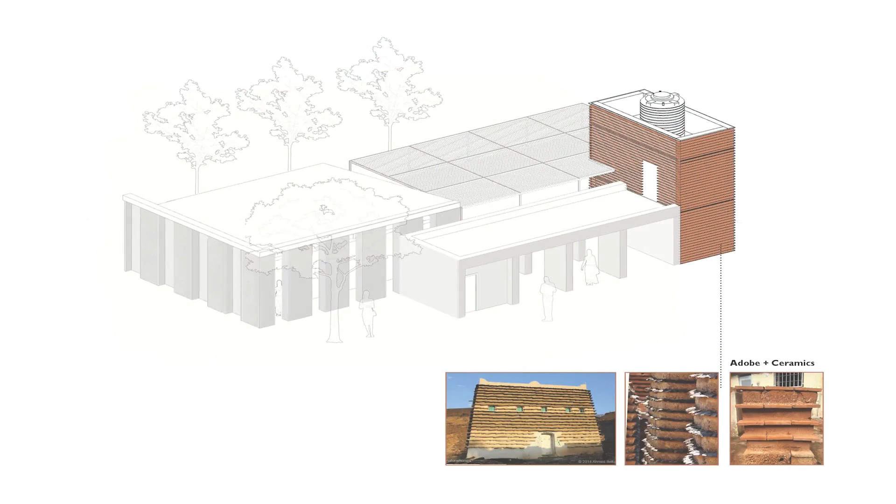To show quickly here: there's a paste made with adobe and mango posts, which is exposed on purpose because we're going to work on how to protect the post with Arabic gum or other fine biopolymers. These service towers are done with adobe and ceramics, and also the classroom, made with cob construction and ceramics as an external layer to protect it from erosion.

Our hope is that over time, this place will evolve into a place of experimentation, to really become the place that enables us to develop this project further - continuing the tradition of not just building on the learnings, but also continuing to research and experiment with various building techniques using local resource materials.

The project is currently under construction, and these are the adobe production using soil found on site, which is really incredible. We went around the city looking for various laterite, but ultimately the one we excavated for the foundation is really the best profile we use to generate the bricks.

At the back right, you have a dry toilet built using local resource Typha. The side barrack is also done with Typha, by a 75-year-old man who weaves them and built his own house out of it. It's really incredible to be able to work with that.

I'll finish with my recent experience teaching in New York, where we found a way to export this methodology and see how it would work in a context like New York State, which obviously doesn't look like Senegal.

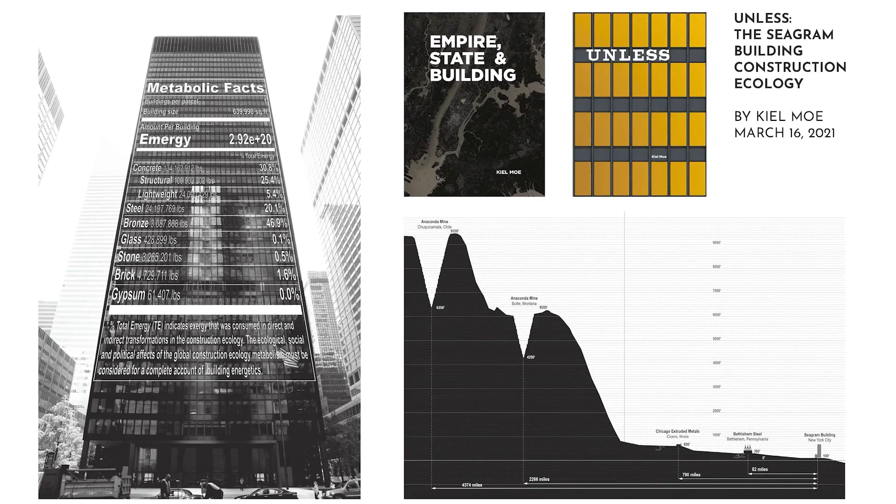This is a place that is highly urbanized and known for buildings like Seagram. I've been interested to rethink those buildings from a different lens. Someone like Kiel Moe, through two of his projects, focused on the construction ecology of the Seagram Building—you can see the building in relation to the amount of material and matter that was moved to generate it. There's another project that speaks about the ecologies attached to the construction of the Empire State Building.

When we look closely at vernacular architecture, we find that a lot of it was produced using stone, clay, fire clay for sure, and maybe not hay—but we felt it could work, since we were interested in working with these materials in Senegal, and wanted to invite students to find a way to work with them in the context of New York. The thing about Typha is that some of the species are actually endemic to the States and to New York, so it was a nice echo and perspective to invite them to work with this material.

Another theoretical framing came from a book called Reciprocal Landscapes, which, going back to the pictures I was showing of the quarry, does a great job talking about the construction of New York City, of Central Park, of the paving on Broadway, and so much infrastructure in relation to the site of extraction. We wanted students to think about a form of reciprocity by actually going to the places where these materials are extracted.

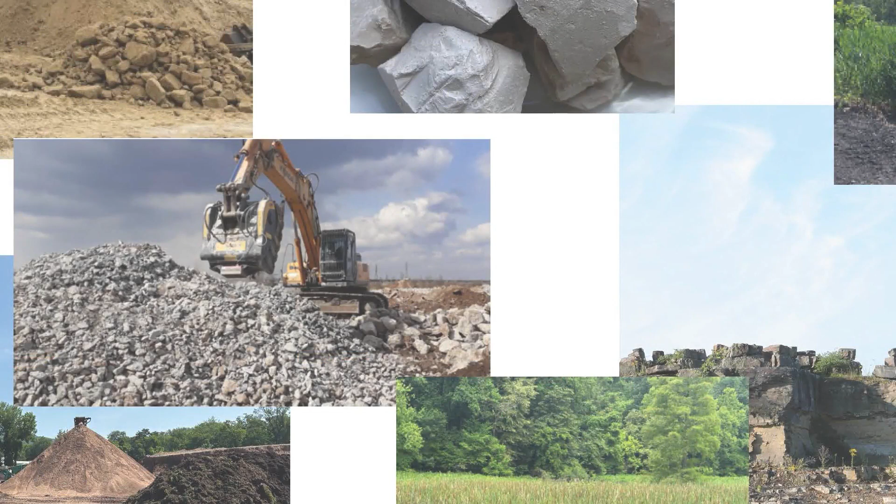We did field trips, found Typha along the way, harvested it, and brought it back to the studio. In the first month, students had to do a lot of interior experimentation since all of this material was new for most of them. It was important that they engage their body and really touch the material to generate a level of understanding with it.

They've done really interesting proposals. Mostly, I think it taught them very basic things, like how you compress clay—realizing how difficult it is to do something like that—or testing out clay-rich soils taken from dump sites in Brooklyn, which actually contain some plastic that generates bricks you could use.

This wasn't a unit that was just about natural materials. It was really a unit to think about how to reshift and have a considered methodology informed by the place—not just through climate and materials, but through the relationship to knowledge systems, the way we use technology, and the way we think about the cycle of extraction and the reciprocity that architecture can generate.

This is one of the proposals by students, which found a way to bring the extraction site to New York City in the form of boulders made of Manhattan schist—not making a building, but allowing the people who live there to inhabit the space, generating a section with multiple uses of stone, from gabions to carved lintels, using the full scope of what's produced from the extraction, and creating a quarry landscape that becomes part of the architecture of the project.

This was the final review. The students were really under pressure, but I think they found it valuable to engage with this methodology to reshift some of their thinking, and also the role of the architect—because we had them think about things they felt weren't any of their business. You have the material, you think about the possibility, you really think about the processes and the impact it has, even on the cycle of extraction. Anyway, that's it.